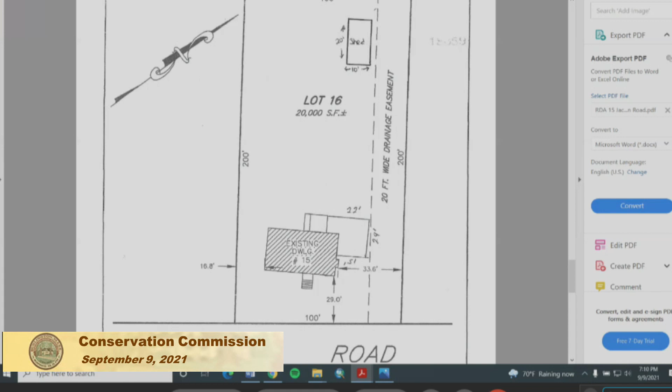So his proposal was to put a shed on his property. As you can see, there's a drainage easement. When he was looking at the wetland maps, he could see there was a drainage easement, which he thought was on the next door property. However, there is actually a stream there. I'm just going to share a photograph of what it looks like. So what he actually did was build the shed almost maybe 5 or 6 feet from the stream bank. He said it was just really grass and maybe weeds underneath the stream bank.

So I don't think he took down any trees in order to do so. It looks like there's very little wetland associated with it. It's just a stream that is not on the regulatory streams map, as it's not a tributary of a named river. There are 15 footings. That's all I have to say at the moment. All right, and when I was out there, I could see it was 15 very substantial footings. We're ready for the next hurricane on that.

Okay, let's see what the commissioners think and if they have questions. Dawn, do you have any questions or comments? Nothing at this time. All right, Gail.

Hi, so I know that you didn't realize you needed a building permit, but do you understand why you're in front of us for this? Why this is kind of a problem for the Conservation Commission? Oh, after looking into it, I fully understand why. I just wish I was aware of it before. Sure, no, I get it. So the riverfront is a really important habitat because vegetation that grows along a riverfront is really important to filtering water that ends up in the river, controlling stormwater to help slow water and decrease flooding and so forth. So it's not just important to your home site, but to other people downstream from you as well.

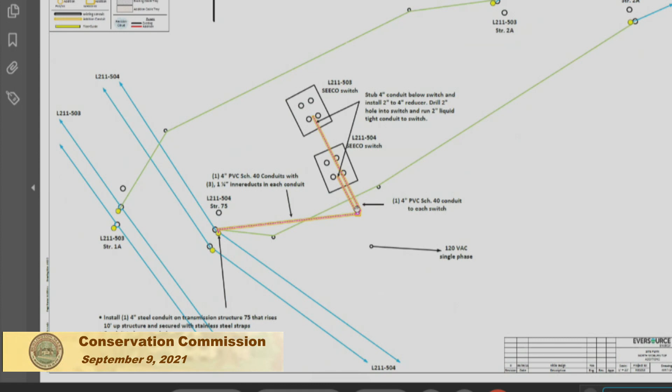They'll be underground. There's a handhole here, and those are typically about 6 inches in diameter, so they're fairly small, not full-size manholes where a whole person can go down, but a handhole literally, so that a hand can reach in. They'll be about 3 to 4 feet below grade and encased in concrete.

So to go back to this figure, that conduit will be installed running from these proposed switch structures down to the handhole and then over to this existing transmission structure here. So again, that work is falling within the buffer zone and riverfront. Actually, I'm sorry, this riverfront is off of this stream.

And we would adjust this, our proposed erosion control line, to wrap around this way to account for the conduit coming south west to the transmission structure.

As far as the general sequence of work, the current right-of-way is maintained, so there are no mature trees within it since they would interfere with operation of the lines. There may be some low-growing shrubs and herbaceous vegetation, so there may be some mowing to get to this location and have a flat work area, outlined in black, but there wouldn't be any major changes in site elevations for that.

So they would excavate the foundations for the new poles, install the rebar forms and anchor bolts, and pour the cement, and then there's a 14-day cure period. Then they would come back and install the actual switch structures once the concrete is cured.

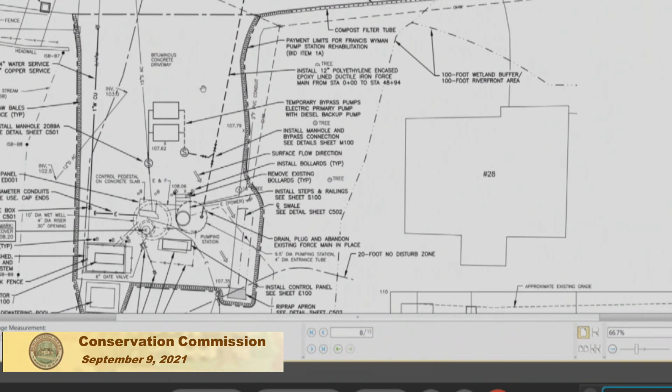Probably makes sense for me to share this site. I'm assuming you're probably going to be most concerned with the pump station site as far as the impacts. Can you see this plan sheet here?

Yes. Okay, so the existing site has the steel can. You basically open the cover up, and you can walk down into it. It's about 20 feet deep or so. That has the pumps, the motors, the controls. Most of the items are down there currently. The actual can itself will stay the same. That's not going to get replaced, but everything inside the can will get replaced.

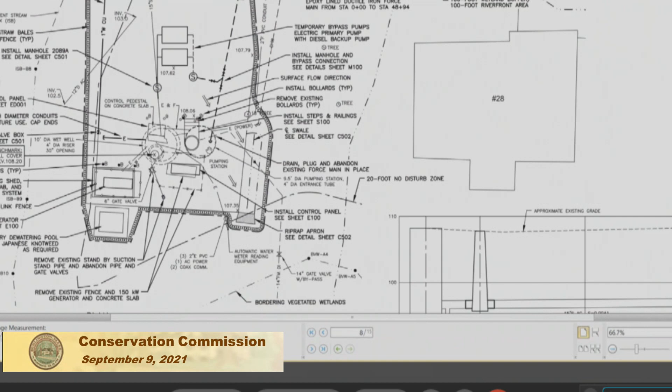Right here, this dashed line is the existing wet well. Again, that'll stay the same. We're going to have it epoxy cleaned, pumped down, and epoxy coated for longevity.

Right now, the existing control panel is this box right here. That'll all get demoed and moved over a little bit to here, and it'll be better if it's kind of out of the way so the guys can get the Vactor trucks into the site.

Right now existing, there's a generator here, which is going to get removed and demoed, and the new generator is going to be placed here on the site where there's an existing shed, which will be removed. So the existing generator will be replaced over here, control panel will be replaced. There's not really a lot of items—everything's going to be pretty similar to how it is now as far as how much is there, just in different spots.

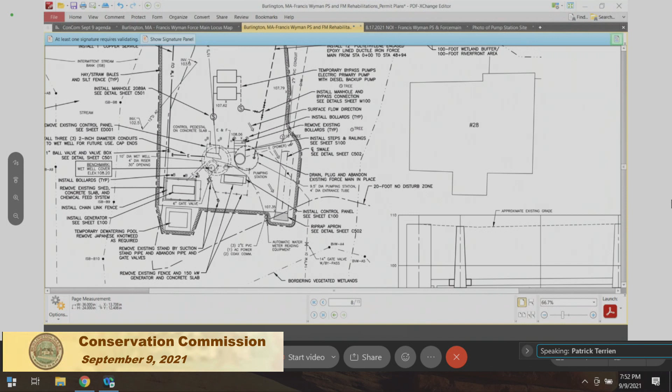As far as how we see the project going, the contractor would come in and cut in. They're going to have to do an excavation here on the site kind of early on so they can put a bypass connection in. They're going to have to also excavate here to put a sewer manhole. We're envisioning they would do those two items first.

They would plug the sewer manhole—I'm sorry, let me step back a second. They would put this bypass connection in, they would put this manhole in, they would install the entire force main. Then once they installed the entire force main and connect it back to where it currently discharges now, they would come back and set up a temporary bypass system: electric pumps with diesel backups, hard pipe, HDPE for the piping. They would pump around, basically around the station, while they did the work on the pump station part of the site.

There will be some dewatering required for these excavations. We're going to be in the water there. There's likely not going to be a lot in the road—most of that's going to be out of the water. There'll be dewatering on this section, but the water gets deeper as we go further along, at least as far as our geotechnical investigation is concerned.

Although there will be some dewatering, obviously, at the stream crossing—and I shouldn't say stream crossing, I guess culvert crossing is a better word to use here.

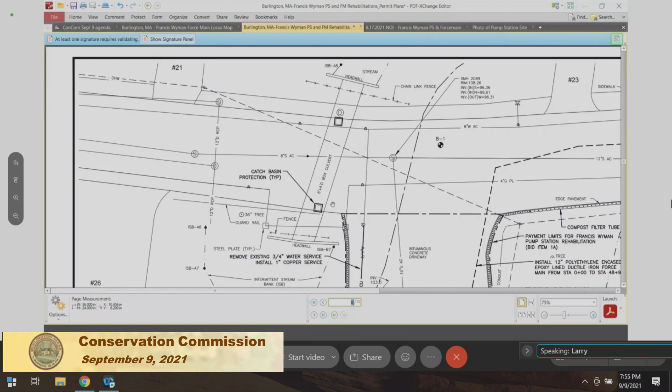I just want to highlight some of the environmental benefits of this project. As they just discussed, the existing sewer line is not only old, but it goes through wetlands. The proposed new sewer line will be totally within the roadway—big improvement there. In addition, what wasn't mentioned, they're going to be reconstructing the parking lot or pavement area where the pump station is, and we asked them to do stormwater improvements as part of that as well.

Okay, so once again, erosion control and dewatering are probably the two big issues with this. They'll be working well into the water table here at the site—not so much maybe in the roadway, but at the pump station.

John, are you suggesting we should have a dewatering plan, or you should approve a dewatering plan before construction? Well, they're showing a location, so we'll probably require it to go through a filter bag or something before it's discharged to that location. Alright, and we do have that included on the plans currently.

There's a detail for the dewatering bag in one of the detail sheets, and this could be adjusted. It's just, John, like when we were on site, there's all the Japanese knotweed that is going to need to—at least some of it—come out. So I think this could probably be adjusted if needed, but it's hard to tell with all that there where we could put it.

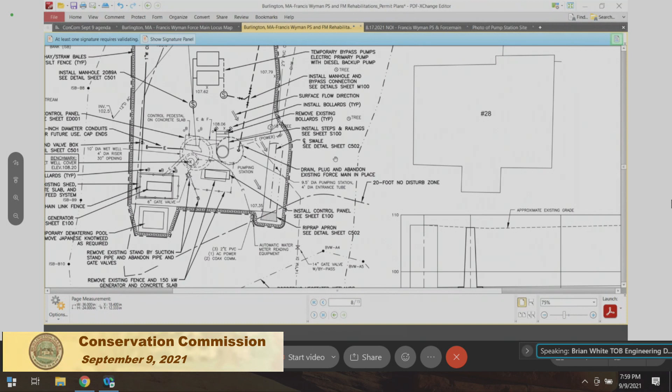So as part of the repaving of the parking lot, as John mentioned, they were looking for possibly some improvement on the drainage. We don't have a full topographical survey of the area, as it wasn't really part of the survey. But based on the crude elevation points that we do have, we think that roughly maybe half the parking lot, like the midpoint, drains to the rear of the site. A portion of it might be crowned. So we think, so we decided...

The other issue is on the northern side, to the left of the screen where the hay bales are shown. The riverbank is really close to that edge of pavement. There's not much room to really work with. Where is that again on the plan? Could you tell me where that is on the plan?

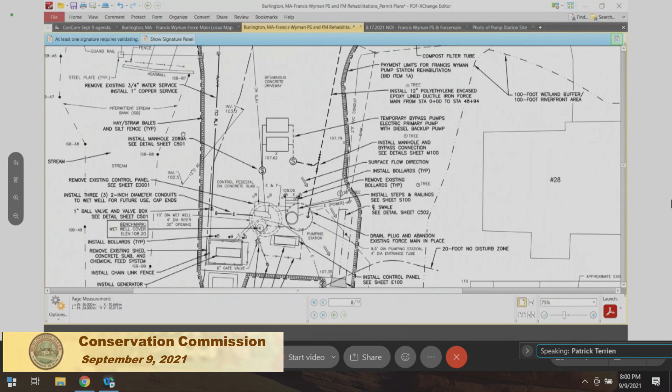So the riverfront is here, and if you look up close in this section, it's like Brian said, it's very close, and it drifts away a little down here. But this area, the grass here is kind of bermed up, and there's already kind of a little gully. But on this side, when we were on site with John and Eileen, it appeared that there was washout. There's no swale here now, so John and Eileen had a thought that it would be a good idea to put some improvements over in this area, and that's kind of where this came from.

Okay, got it. All right, what is the existing generator? Is that gas or oil fired? It's a diesel. Yep.

Will you be scanning for any leakage or contamination when you pull out the old stuff?

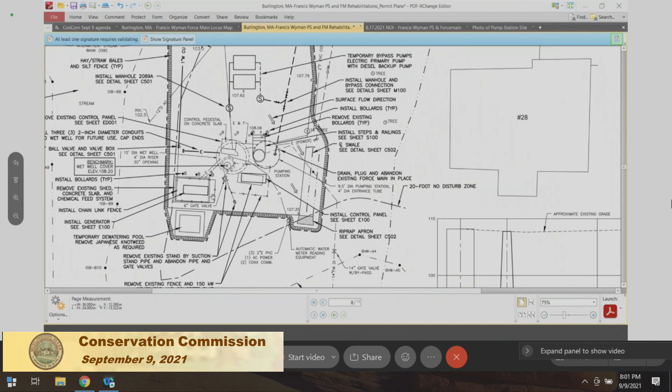Yeah, I believe, Patrick, you could correct me if I'm wrong, but typically with any kind of removal there's specifications for if you encounter hazardous material or hazardous waste. So if that's encountered, they would have to comply with those specifications and remove it as far as possible. So you're saying that will be in the specification to the contractor.

As far as... I'd have to check to see if we have anything specific, but obviously there's items as far as environmental protection, making sure there's no spills on site and those types of things. And if there are spills, what they need to do to remedy those spills. But I'm not sure if we currently have anything specific about how to drain and pump the tank out and get rid of that, as an example.

Well, if there's a leakage, there should be a requirement for notifying the Board of Health, and certainly if you find that there's been leakage into the ground, notify the Board of Health and the Conservation Commission.

And for whatever it's worth, to clarify, the existing tank is under the belly, it's not in the ground, it's under the actual generator. So it's not an underground storage tank. Oh, okay, all right, that helps. I think they're double walled, double contained.

Even from 50 years ago? Well, yeah, I don't think that generator's 50 years old. They usually have to go replace them sooner than that. I mean, I could be wrong, but I don't think the generator's as old as the actual pump station. So I think the specification should have notification if contamination is encountered. Sure, okay, that's easy.

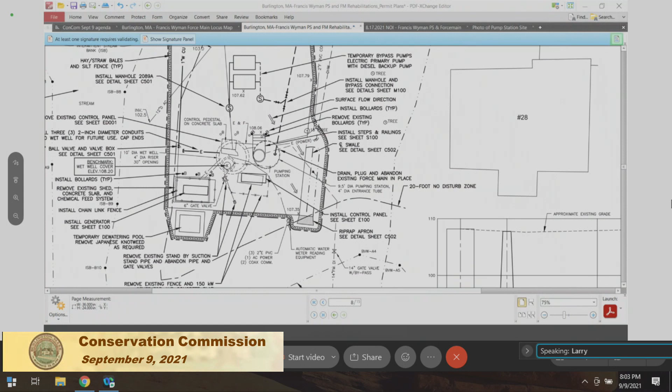Well, they are going to have the diesel generator. I don't envision them storing tanks of fuel, but the requirement is that they're going to have electric primary temporary bypass pumps, and then diesel backup in case the power goes out or they fail. There'll be fuel in the generators, in the pumps, but they'll just fill those as they need. They're not going to leave big tanks of diesel there, as an example.

Okay, so there's no gasoline storage? No. Nope. Okay, all right, because if there was, we should have a place for where you're going to store it and how.

Okay, are you aware of, or have you checked whether there's any contamination along Francis Wyman Road to be concerned about? We did a review of the Mass DEP sites and there was nothing that came up. We didn't do environmental borings, but we did do geotechnical borings to determine rock and soil types, and nothing came up that concerned us as far as environmental hazardous waste.

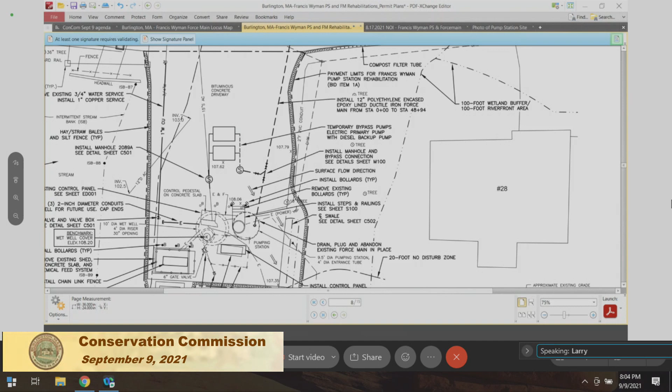Okay, yeah, I don't know of any. I've lived in town a while, as some others have, but I don't know of anything along Francis Wyman either. So my question is that there is a crossing of, or a nearby wetland further down Francis Wyman.

Isn't there? Yes, let me pull it up. I'm assuming near Morrison Road. Yes, so I think you're talking about this crossing right here? Yeah, that one. Is there others? No, that's it, where the roadway is close to wetlands.

If there was a spill, doesn't the pipe become a conduit for conveying hazardous material? I assume at least if it's either level or goes downhill to that point, which I think it does. Should you put in check dams so that it doesn't get into the resource area if there was a spill, or something? Do you mean, I guess I'm just trying to understand the question fully. Are you talking about the stone bedding of the new force main that it would track through?

Yes, I was thinking the stone bedding in the event of a spill, not necessarily by you guys or as part of this construction. I'm just wondering if it's useful to put in a check dam, either along the entire route down Francis Wyman, or it would be prudent, same question, near the bordering vegetative wetland.

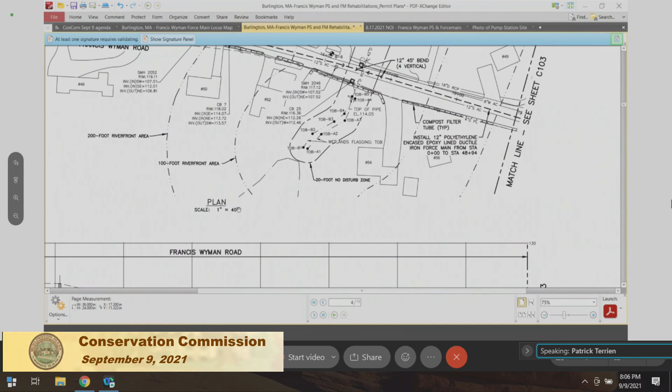Right, yes, I mean, it is something we could put bentonite dams, call them, at a minimum on each side of this. We'd have to take a closer look as far as where the groundwater is and if we thought it was necessary in other locations. Groundwater here during borings was, like you're alluding to, very, very shallow, 3 feet, so we're definitely going to be in the water there.

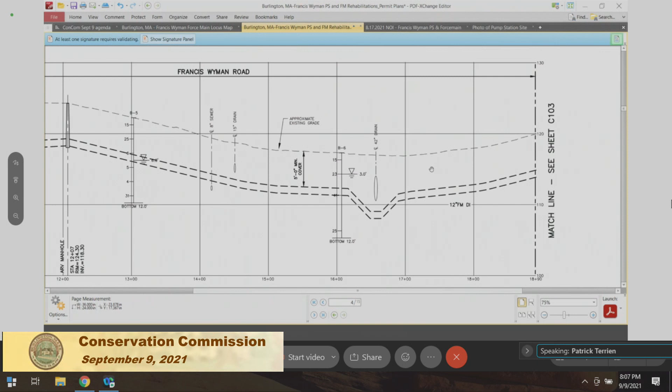It gets a little deeper here, and I think as we go toward, I think it's the south, we get out of the water fairly quickly. So that is something that could be considered, at least for this location.

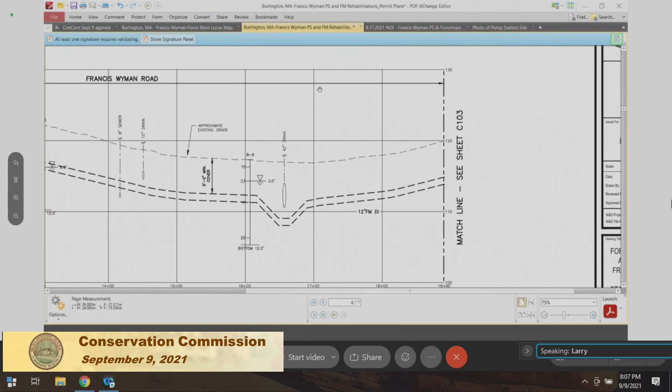Yeah, well, here's what I'm asking. I'm asking for you folks to take a look and evaluate and assess whether it would be useful in certain locations. I brought up where that wetland crossing is, because that's one of the most sensitive areas. But along the whole route of the pipe, I would like to hear your judgment, that you've looked at it, and here's what's being proposed or not proposed and why.

So typically, if a pipe is going to be in the water, or we think it's going to be in the water, force main or gravity sewer, design standard tends to be 300 feet - every 300 feet you put a bentonite dam. Most of this is not going to be in the water, it goes uphill pretty quickly. So we can certainly look to see where we think it would be a good idea to put the dams, but I'm guessing it's not going to be the whole site based on where the groundwater is.

Right, I suspected that you would say that, but especially since some areas go uphill, if you could take a look at that and tell us what you think, I'd appreciate that. Okay.

And let's see if there's anything else. I think that's all I had. Okay, I think that's all I have right now.

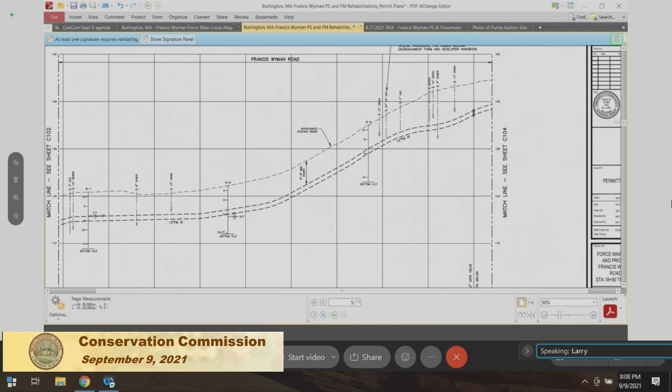Let me ask, is there anyone in the audience for this? This is the pump station and the force sewer main replacement along Francis Wyman Road. Is there anyone in the audience that has a comment on this?

Oh, okay, there's nobody. I had one question, not necessarily related to wetlands protection. Is there any maintenance required on the force main, like some anti-fouling agent or something that is put into the pipe every 5 years or every 10 years? Is there anything like that done?

No, the force mains should be designed so that they have, in theory, a consistent slope upward as much as can be practical. If there's low points or high points, you may get some air in there, so you can install an air release valve—there's one on this section. But as far as chemicals inside, as long as the force main has enough velocity to resuspend solids every time it puts the pumps back on, then it's not a concern. This is designed to have a pretty good velocity, well over minimum design standards.

The purpose in asking was asking if there was regular maintenance, is there a certain type of chemical that was going to be in use for that maintenance? That's what I was really getting at. So, okay, I think you've answered that.

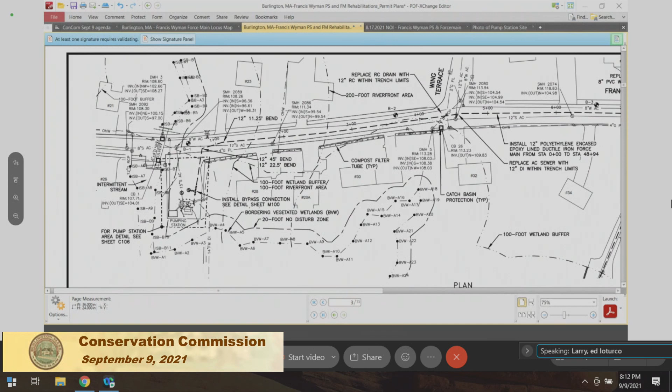All right, do we need a motion to continue therefore? Could I have a motion to continue the sewer pump and force main project on Francis Wyman Road to the next meeting of September 23rd? So moved, Indra. Second, Ed. All right, Don, how do you vote? Yes. Gail? Yes. Indra? Yes. Ed? Yes. And the chair votes yes, so this hearing is continued to September 23rd.

Oh, I have one more comment before you folks go. I thought you guys did a nice job. Was it Weston and Sampson you guys are with? That's right. Yeah, you guys did a nice job on these plans. They were very clear—sometimes the stuff is squashed in so small you really can't read it. I was quite impressed with the legibility of it. It was a nice piece of work. Thank you, I really appreciate that. You're welcome. Okay, so we'll see you on the 23rd. Thank you, commissioners. Thank you, John and Lee. Take care, have a good evening. Thanks, you too.

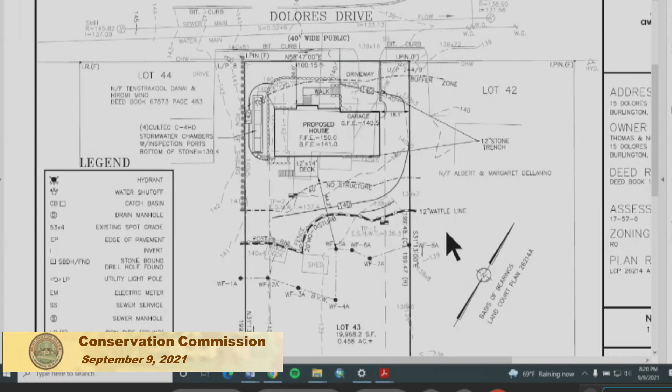All vegetation pretty much back to the 20-foot is your proposal? Yeah, that will all stay. Again, just to remove those 2 structures, that's the only thing that will be disturbed. Okay.

Those are my questions, Larry. All right, thanks, Eileen. Don, any questions?

Yeah, I do have a question about the elevation. I'm looking at your plan. What do you have for elevations for the proposed house as opposed to the elevation to the wetlands?

So the basement is proposed to be at 141. If you see that it says BFE, that's basement floor elevation. The wetlands is down at about 139 or so, depends where you look. It does vary across the site.

Okay, but we did find the groundwater too. We established the groundwater at the highest location was about 137.4. That's the groundwater elevation, so the basement should be above the groundwater elevation. Even the footings probably will be just above it. So I think we'll be okay with the groundwater.

Yeah, the one red flag I see is in terms of when you do your demolition on the existing structure. I'd like to hear a little more detail about how you're going to protect the water from flowing downhill into the wetlands, or runoff or whatever other debris is generated.

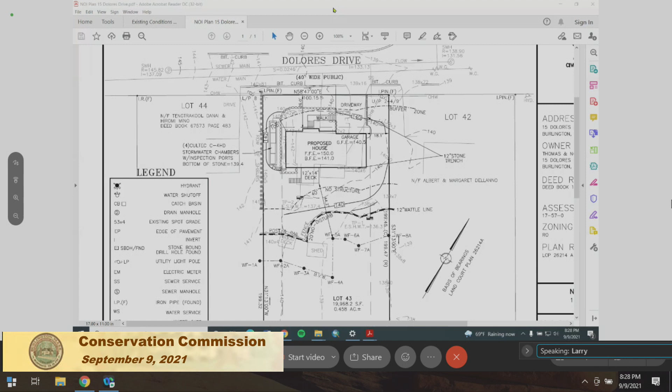Well Larry, when we're on site, I think John and I will probably get a clearer idea of what other trees will be coming down, and if there are significant trees to be removed, we'll suggest they put that on the plan. Okay, got it. So the two things I have are the wetlands line review and a clearer idea of the trees. Anything else?

Mr. Romero, are you thinking of the next meeting, September 23rd? Yes, that'd be great, thank you. Could I have a motion from the commission to continue the hearing for 15 Dolores Drive to our next meeting of September 23rd, 2021?

Moved. Second, Don. Don, how do you vote? Yes. Gail, yes. Indra, yes. Ed, yes. And the chair votes yes. So by a vote of 5-0, the hearing for 15 Dolores Drive is continued to September 23rd, 2021.

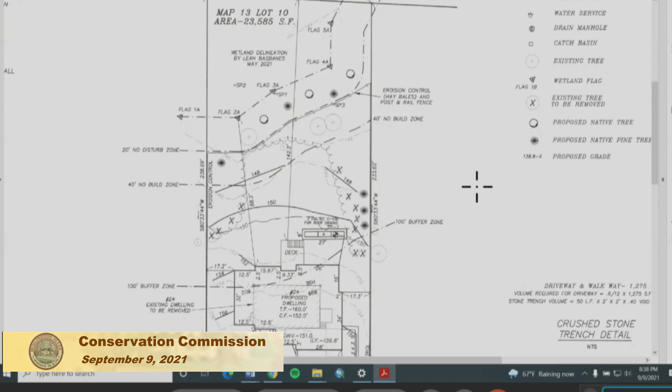I thought maybe going in on the left side 5 feet and then it goes a little straighter across. It's up to him, but it's okay with Mr. Saab. On this particular site, the contractor was trying to get as much backyard as possible, so he was happy with the line like that, since the wetland goes back to the back right corner of the property. If you and the contractor are happy following the line, that's fine with the post and rail fence. I don't think it needs to be a straight edge - you can use it for visual interest. I was only throwing it out there as a question. That's fine, it's not something that needs to be done.

If there's no further comment on the order of conditions, could I have a motion to close the hearing for 24 Hart Street? So moved, Gail. Second, Indra. Don, how do you vote on closing the hearing? Yes. Gail, yes. Indra, yes. Ed, yes. Chair votes yes by a vote of 5-0-0. The hearing is closed for 24 Hart Street.

Could I have a motion to approve the findings as discussed for 24 Hart Street under Burlington Bylaw Article 14? So moved, Ed. Second, Don. Don, how do you vote? Yes. Gail, yes. Indra, yes. Ed, yes. Vote of 5-0-0. The findings are approved for 24 Hart Street.

Could I have a motion to approve the order of conditions as discussed under both Burlington Bylaw Article 14 and the State Wetlands Protection Act for the project at 24 Hart Street? So moved, Gail. Second, Don. Don, how do you vote? Yes. Gail, yes. Indra, yes. Ed, yes. The chair votes yes. The order of conditions is approved by a vote of 5-0-0 for the project at 24 Hart Street.